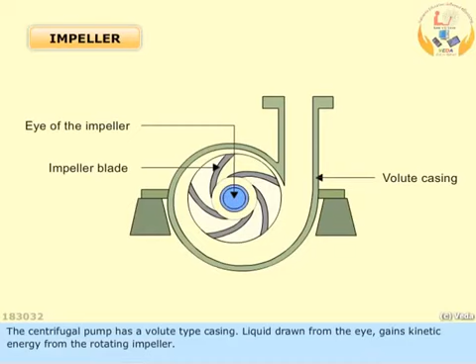The centrifugal pump has a volute-type casing. Liquid drawn from the eye gains kinetic energy from the rotating impeller. The curvature of the volute converts this kinetic energy into pressure energy along the casing walls.

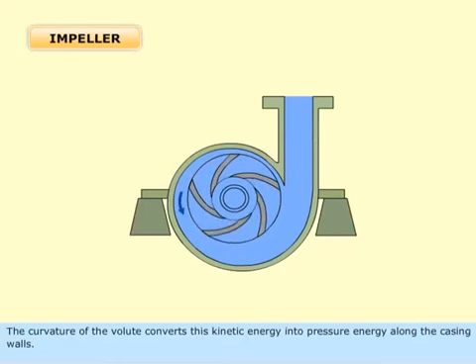In order to increase the pressure of the fluid, a set of fixed vanes called a diffuser is fitted inside the casing of centrifugal pumps.

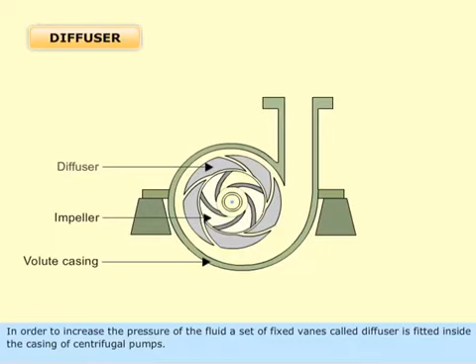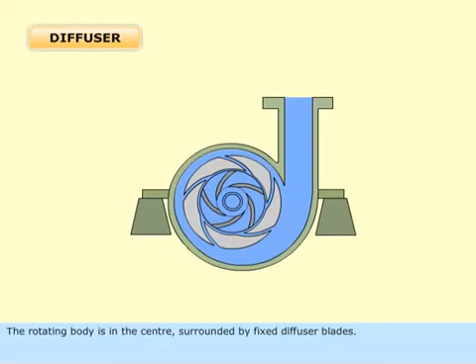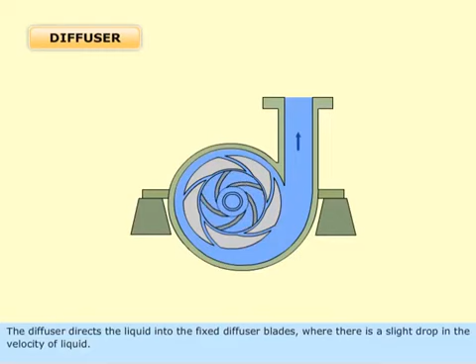The rotating body is in the center, surrounded by fixed diffuser blades. The diffuser directs the liquid into the fixed diffuser blades, where there is a slight drop in the velocity of liquid. This drop in velocity is compensated by an increase in the pressure of the fluid.

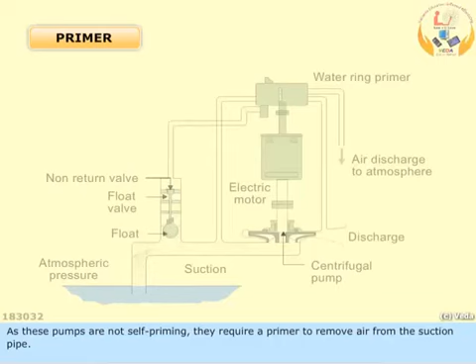As these pumps are not self-priming, they require a primer to remove air from the suction pipe. You can see a water ring primer coupled to an electric motor and centrifugal pump set.

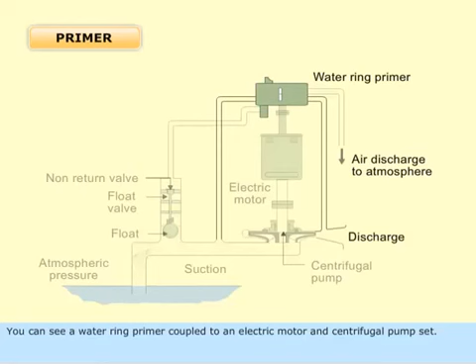The centrifugal pump suction pipe is fitted with a float chamber. The float operates a valve on the pipe connecting the float chamber and the air pump suction. When there is no liquid in the suction pipe, the float drops and the valve opens. A bronze spring holds the float.

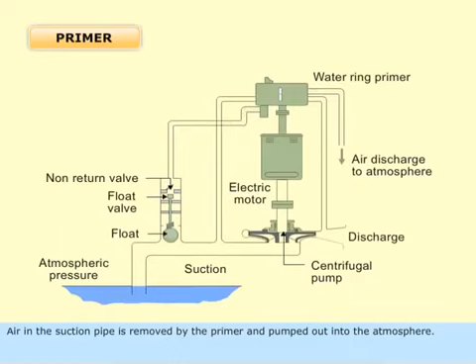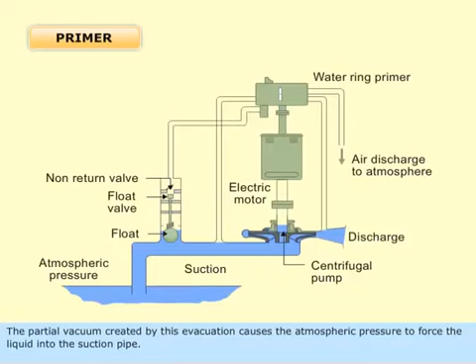Air in the suction pipe is removed by the primer and pumped out into the atmosphere. The partial vacuum created by this evacuation causes the atmospheric pressure to force the liquid into the suction pipe. The rising liquid will lift the float and close the valve.

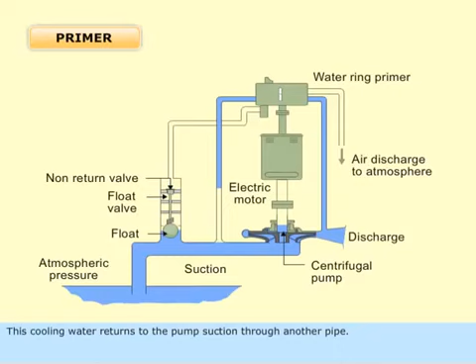A pipe from the centrifugal pump outlet provides cooling water to the primer. This cooling water returns to the pump suction through another pipe.

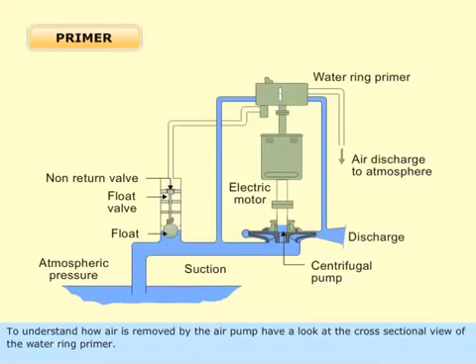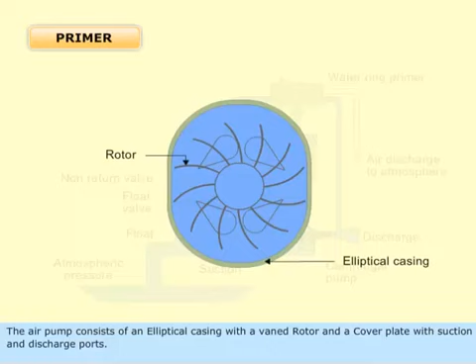To understand how air is removed by the air pump, have a look at the cross-sectional view of the water ring primer. The air pump consists of an elliptical casing with a vaned rotor and cover plate with suction and discharge ports. The casing is partially filled with water.

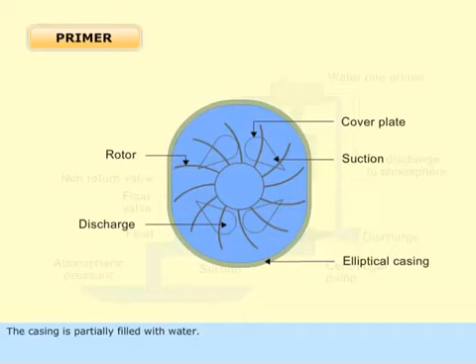When the pump is running, the water flows along the periphery of the casing due to the centrifugal force imparted to it by the rotor, creating a water ring.

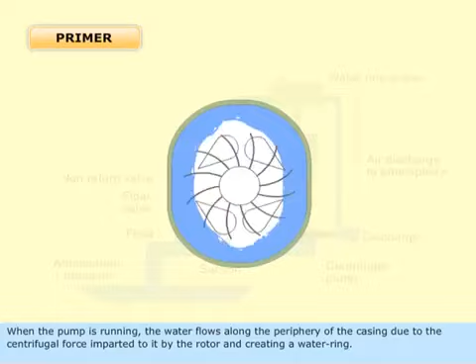As the rotor vanes pass the suction port, air in the suction pipe is drawn in and trapped between the water ring and the pump shaft. This slug of air is carried around and delivered to the discharge port, from where the air is discharged into the atmosphere.